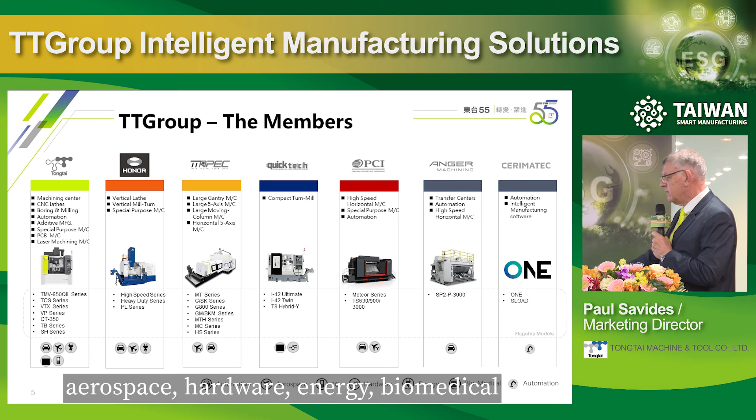TONGTAI is made up of a number of groups established in different areas. The first four of these are in Taiwan, then we have two in France, and one in Austria. These cover the automotive, aerospace, hardware, energy, biomedical, and automation sectors.

This is our digital transformation taking place across all of these sectors that we deal with, so we are able to bring the different sectors' transformation into one single unit for TONGTAI.

TONGTAI was started in 1969 as a small company making special purpose machines. Over the years, it developed into a stock-listed company, following many technology pursuits over many years. During its history, we've gone through four stages.

The first stage was naturally the beginning that everyone has to start with, where a Japanese investor came to Taiwan and started the company TONGTAI. Then we began customization, moving from special purpose machines into customization, and then we transformed.

You will notice very clearly in this slide that each time there was a problem in world economics, there was a little dip. You can see those dips. What happens during those periods is very important—this is when TONGTAI actually puts their most effort into what they're going to do next, and the transformation.

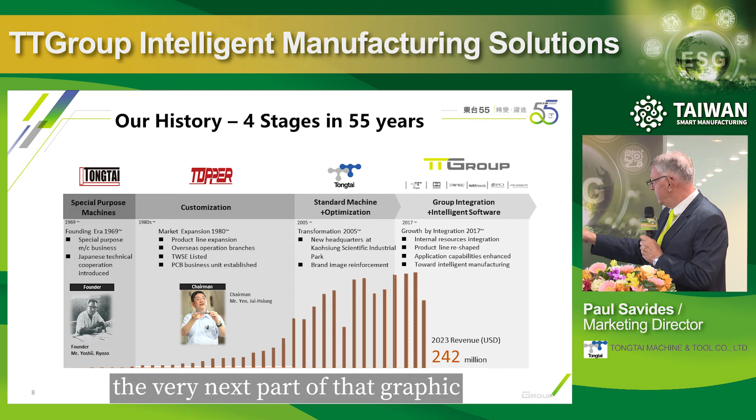We call this intelligent transformation. In each of these cases, once we have taken a dip, the very next part of the graphic shows a sudden increase. We see right now that with the world economic dip that has taken place since COVID...

...we've put a lot of effort into digital and green transformation. You will see that after this, in the next year or two, it will suddenly start going up again because of the effort that all of the companies have put in.

How do we accomplish this intelligent transformation? You can see by this slide that TONGTAI has over 150 engineers. 25% of the employees are in R&D, and this R&D has resulted in over 200 patents that they've been able to establish.

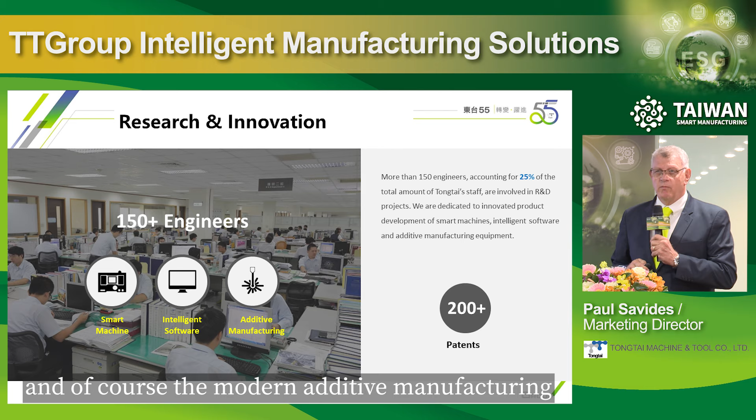These patents all head towards green and digital transformation. We do smart machines, intelligent software, and of course modern additive manufacturing, not only subtractive as it was in the past. Also, TONGTAI has established a global network.

What is important about this global network is not only the factories and overseas branches, but the technical application centers in 7 different countries. These application centers assist customers in utilizing the current technology we have, and we are able to teach them and demonstrate physically what it can do for their business.

This is a very, very important step in not only having this digital or green transformation, but actually handing it over to the people who need to use it.

Our product strategy, as you can see, starts off with a standard machine. It develops into a specific workpiece, or we assist the customer. But what we really like to see and do is integrate the intelligence we have now developed and put it all into the system so that it becomes user-friendly. And that is where green transformation starts to take place.

So what we have is an intelligent manufacturing solution, basically with 7 points. We've taken all of the intelligence that we can do and put it in. We've put automation, we do turn milling, which we now call turnmill. We do the new processes like DED or CNC additive manufacturing. We also do the new industries.

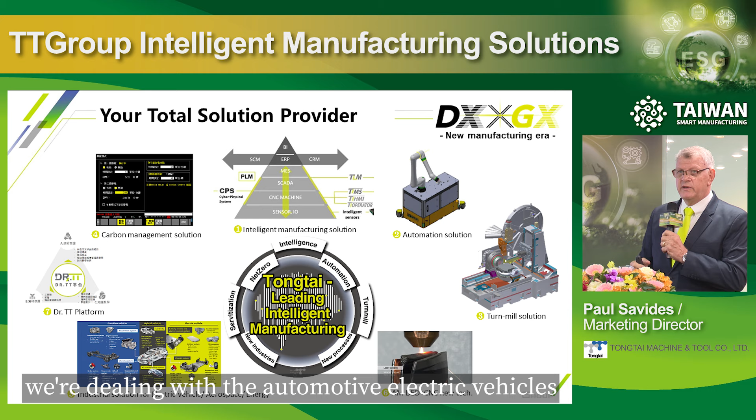We're dealing with automotive, electric vehicles - these are very important for the green transformation in the industry as well. We add to that the servitization. There are systems that we use and give to the customers to be able to improve the service of their machines so they have better manufacturing ability and less breakdowns and less problems.

And we also apply net zero, not only within our own company, but we supply it to every single machine, and we try and improve the machines so that the machines can actually help the whole world improve, because machine tools are the base of the whole world. Everything you see, your glasses, a bottle, everything starts with a machine tool. Your clothes, buttons, anything you can think of, jewelry, starts with a machine tool. Machine tools are used extensively in the world.

So when we have a look at the intelligent manufacturing triangle, it's a very complicated system in the middle. So what we try and do is modify the system to make it more simple for the end users. On the right-hand side, you will see there are intelligent sensors which we've developed. There are systems that help the customer find all the little glitches and faults inside the machining cycles that happen - not only the machine faults, but also maybe a manufacturing fault or a flaw in their system, or that they're not manufacturing smart enough.

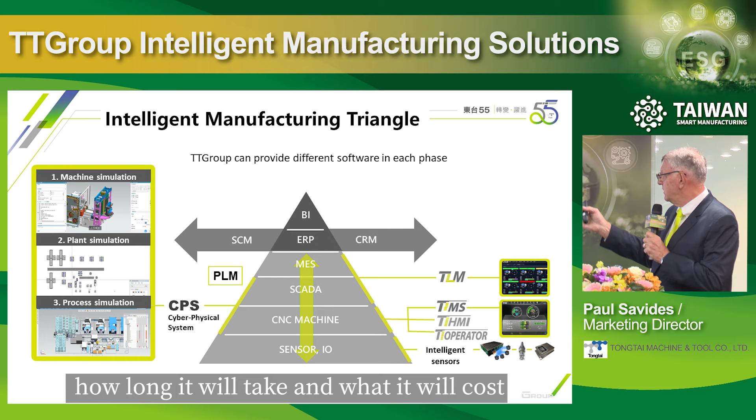On the opposite side, we have our cyber physical systems, where we can actually take a machine and we can take your part, put it into the machine, and machine it with the machine's original CPU. And we can give you an exact time, an exact cost that part will take and what it will cost - and we can do that without even running the machine. So again, it adds to the green that we are trying to achieve.

On the side of the edge computing, we have these management systems that are inside. We have a simple system, the TI operator. It's part of the actual machine system, part of the software that is inside the machine. And what this system does is it gives us all of the parts.

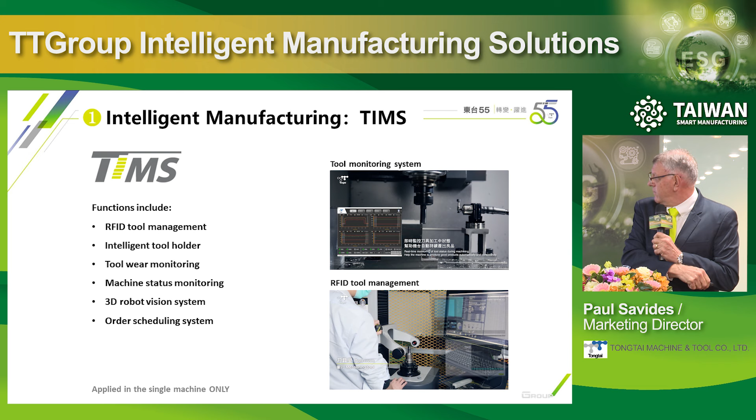We also have TIMS, which is a little bit more advanced than the previous one. And then we have our total line management system, where we can transfer all of our information back into a system that you can monitor from far away. You can monitor something in the USA, here in Taiwan. You can look at any part of the system and you can utilize it.

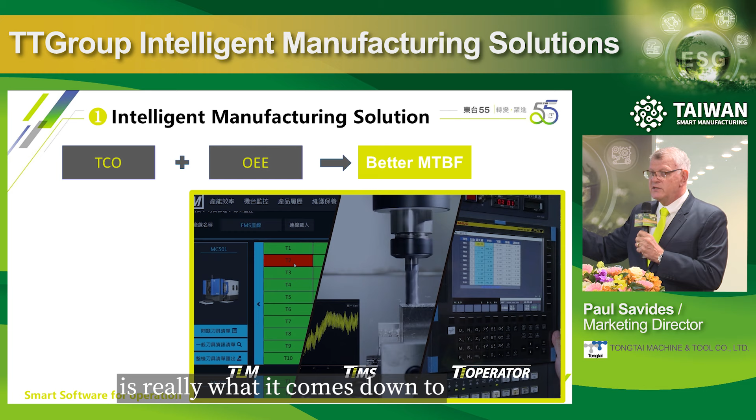So intelligent manufacturing systems come down to a few basics. The total cost of ownership and OEE, overall equipment effectiveness, is really what it comes down to - the mean time between failure of a machine. We measure all of these factors and we are able to reduce the number of failures and therefore increase productivity and therefore increase the ability of a customer to make money.

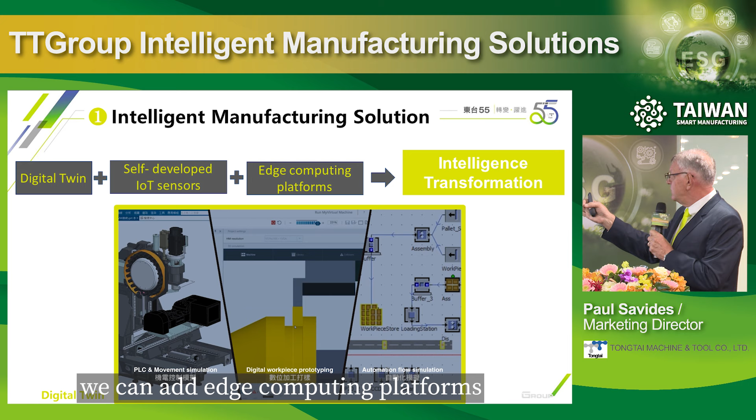Intelligent solutions also include what we call digital twin, where we can take the machine and copy it into a system. We can then add sensors, add edge computing platforms, and then we have intelligent transformation of a machine to become something new and something independent and something that can actually be of value to the end user.

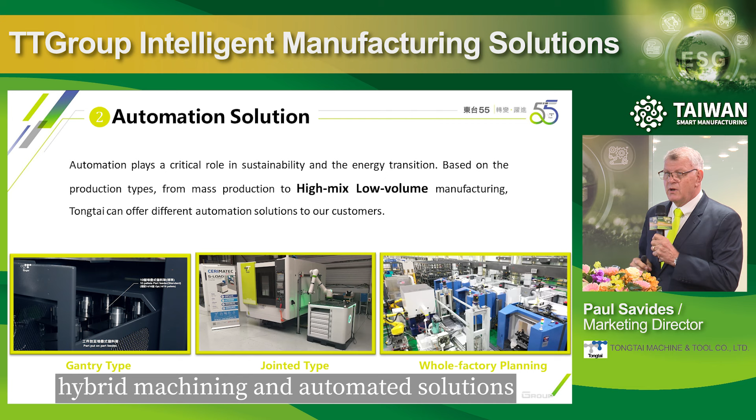The modern machines and the modern way we work with high mix, low volume manufacturing has forced us to make hybrid machining and automated solutions. We really need these solutions today to be able to advance that people can take small volumes, and we can modify and use a lot of technology so that we can have many different products repeating one after the other. That's the hybrid solutions that we have.

So there's an example of a hybrid solution and what it does for the green economy.

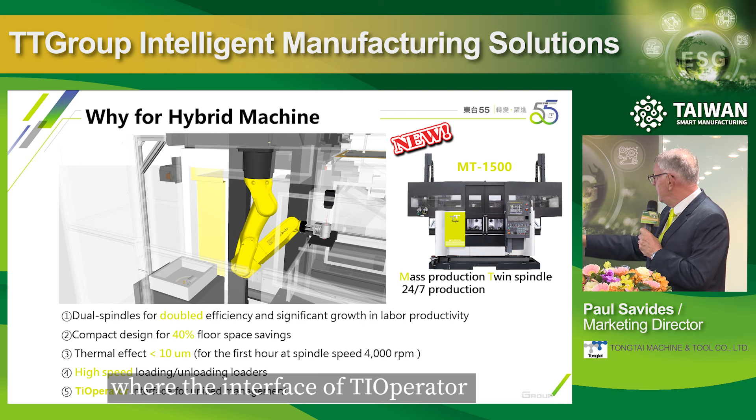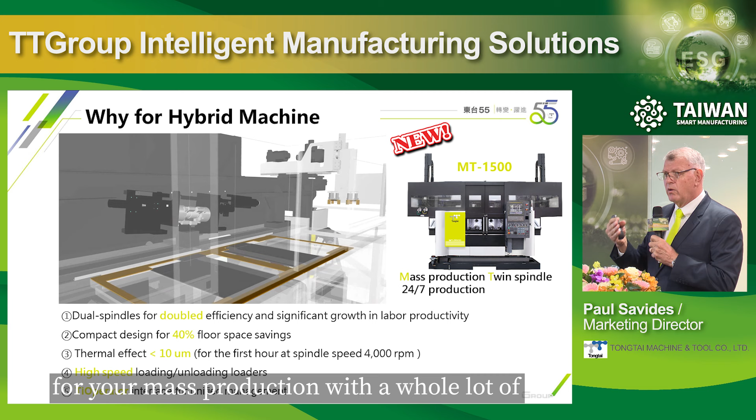It uses less floor space and offers better thermal deflection, with high speed loading and unloading. With the interface of the TIOperator, we can manufacture 24/7 with these machines. What's so important is that not only can they give you more production, but they can give you more varied production for mass production with a whole lot of different components through the system.

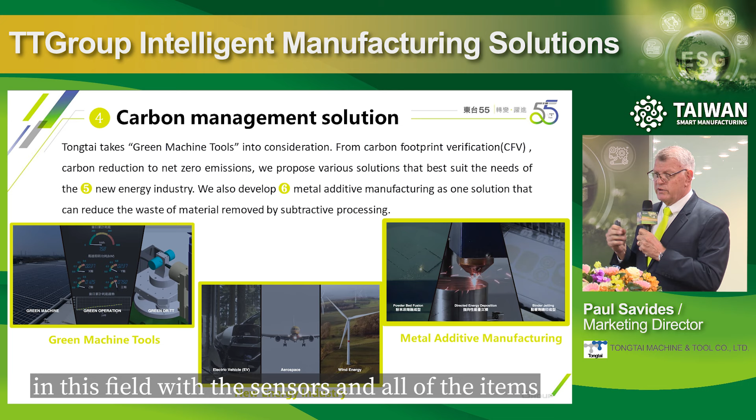A carbon management solution - everything we have done as a company, right through every industry, we have tried to see how we can green the machines, how we can make the transformation to green better and more valuable for the end user and for every country in the world. We aim to be more active in this field with the sensors and all the items we use to make it easier for them.

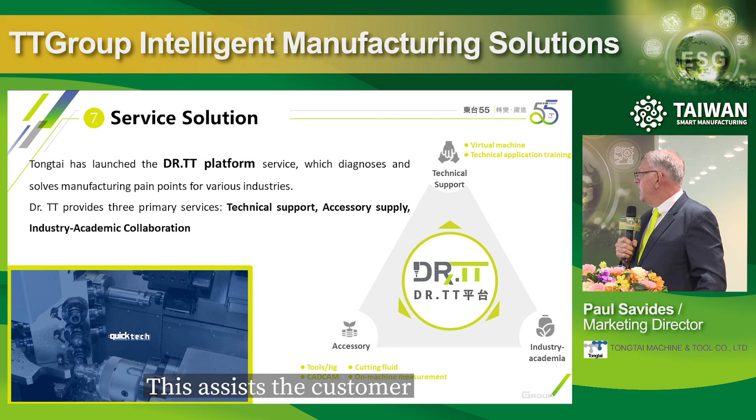In our carbon management system, within our machines we actually have systems that modify and look at the numbers, and at the flick of a button we can see what our carbon footprint looks like. We also have another platform, the DR.TT platform, which is very important. This assists the customer in his ability to look after his machines and keep them running at an OEE of over 85%. It is vitally important that we do this.

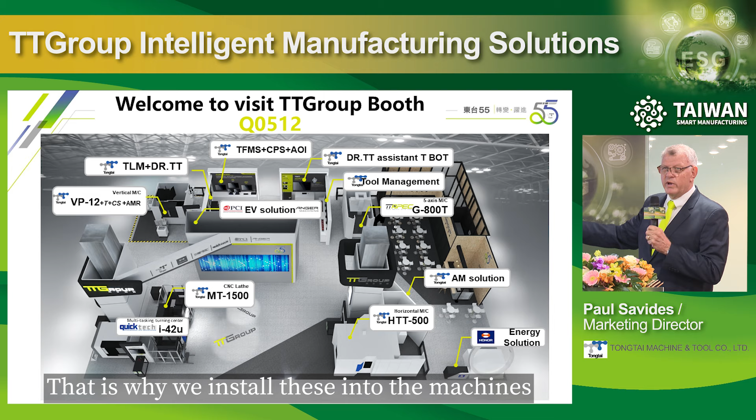One of the things I'd like to tell you is this is very much like a golf club. Take a golf club and put it in your hand, and what is it worth? $100. Take that same golf club and put it in a professional golfer's hand - it's worth millions. All of this technology which we have, and will show you, in your hands is going to be worth a lot of money to you in terms of your productivity and where you can go and what it can do for you and your business. This is why we install these into the machines - they're not for us, they are for you.

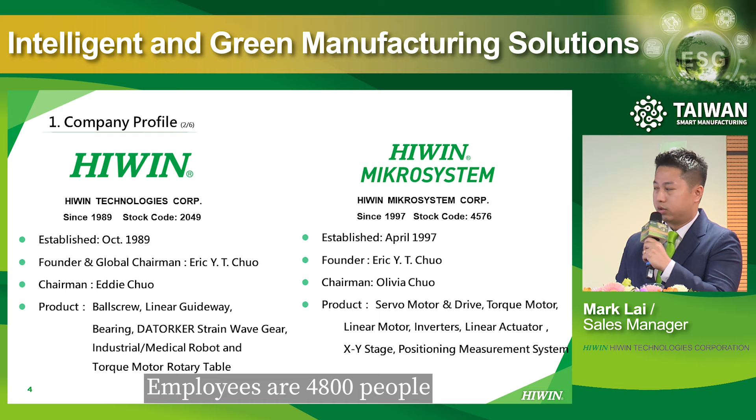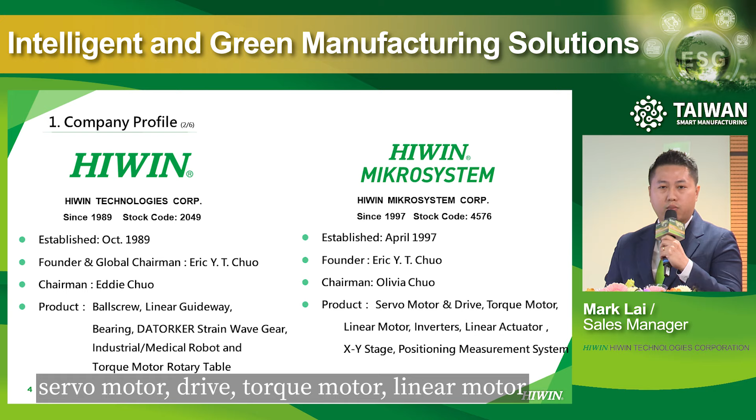HIWIN was established since 1989, and the founder and global chairman is Mr. Eric, and the chairman is Mr. Eddie, with employees of 4,800 people. The product range from HIWIN technologies includes the ball screw, linear guideway, DATORKER strain wave gear, and the mechatronic product for the medical robot and torque motor rotary table. HIWIN Mikrosystem was established since 1997, and the chairman is Miss Olivia, with product range from servo motor, drive, torque motor, linear motor, and XY stage.

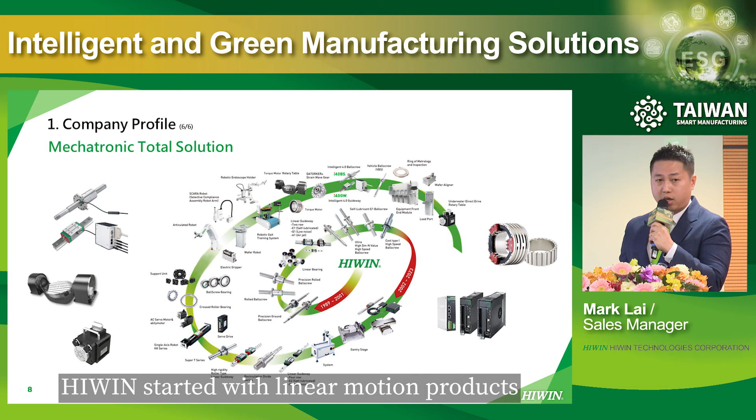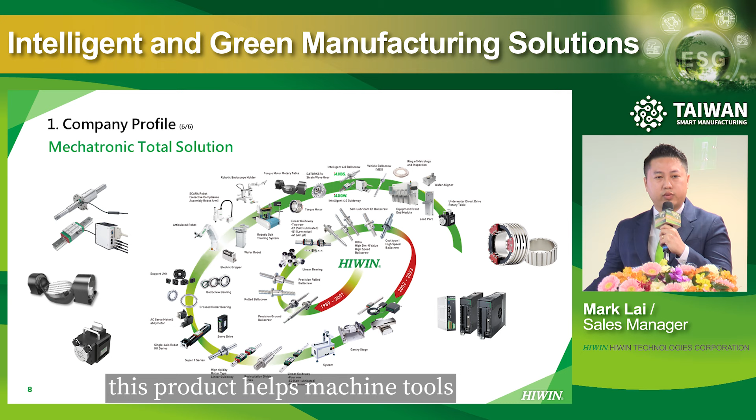HIWIN started with linear motion products such as ball screw and linear guideway, then subsystem products for wafer robot and load port for the semiconductor industry, and then system products for torque motor rotary table. With torque motor technology integrated with the rotary table, and the intelligent module combined with the ball screw and linear guideway, these products help machine tools upgrade their value and productivity.

For the 2024 TMTS exhibition, HIWIN focused on eco solutions for green. HIWIN continues promoting ESG in line with industrial global trends toward industrial intelligence and transformation of manufacturing towards intelligence, precision, high efficiency, and carbon reduction, which has become the dominant trend.

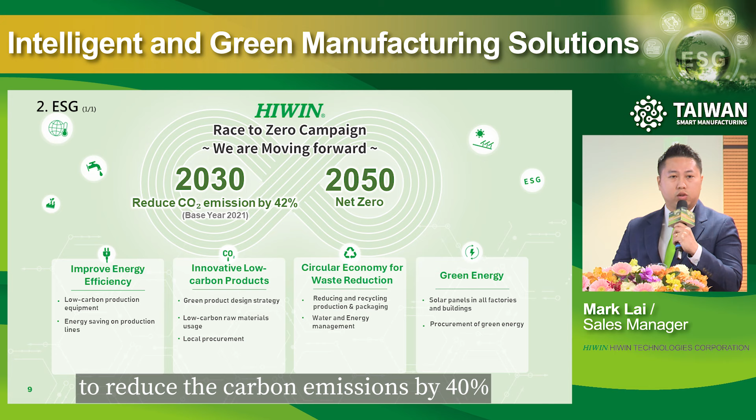As you can see by this chart, HIWIN Group has set a target to reduce carbon emissions by 42% by 2030, and to achieve net zero by 2050, through improved energy efficiency, low carbon production equipment, and innovative low carbon products for a green product strategy design, circular economy for waste reduction, and procurement of green energy such as solar panels in all factories and buildings.

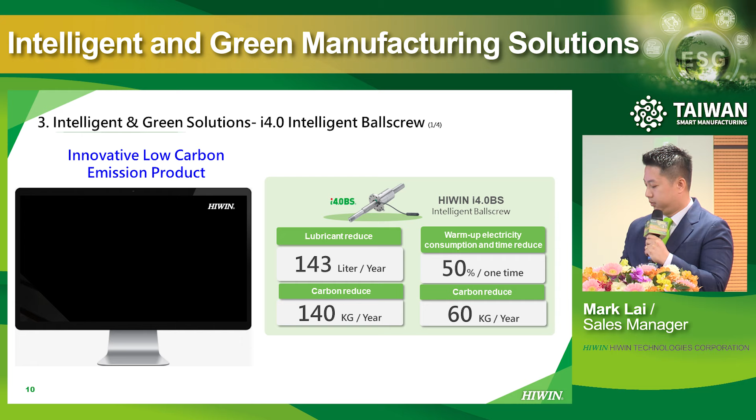In this chapter, I would like to show our intelligent and green solutions. This is one of HIWIN's innovative low carbon emission products, the intelligent ball screw.

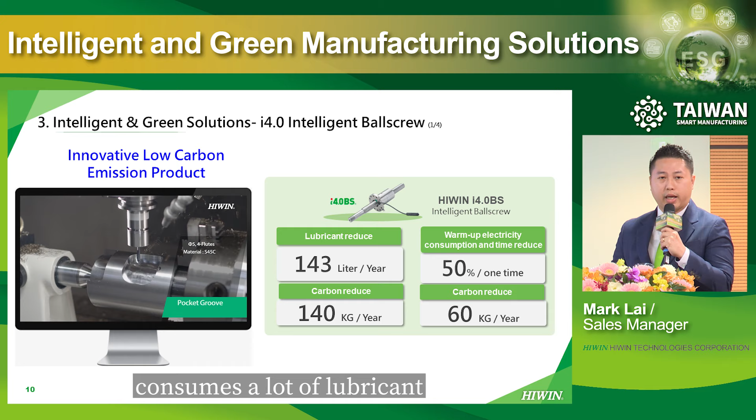I would like to share one of HIWIN's customers. They are using a mill turn CNC to produce precision metal components. The original design of their machines consumed a lot of lubricant, polluted the cutting fluid, and affected the quality of the parts produced.

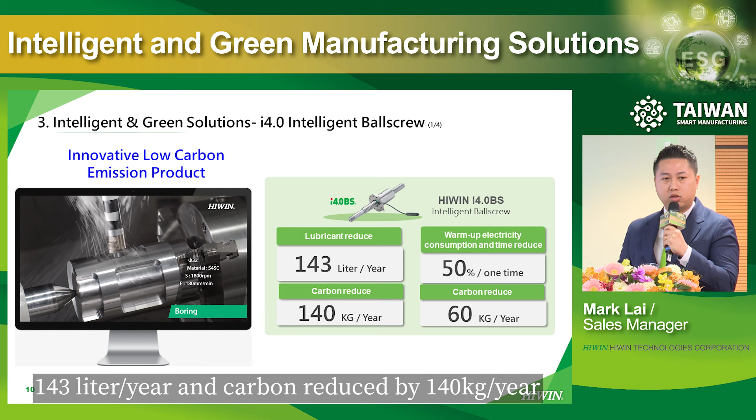With the intelligent ball screw module, the lubrication unit pumps oil only when necessary. As you can see from this chart, using the intelligent ball screw module reduces lubricant by 143 liters per year, with carbon reduced by 140 kg per year. The warm-up electricity consumption and time were reduced by 50%, with carbon reduced by 60 kg per year.

The intelligent module includes ball screws for machine tools, linear guideways, and single axis robots for the semiconductor industry.

With a sensor to detect vibration data, sent to an edge computing module and then delivered to the customer's display device to check the machine's status, there are 4 key functions: vibration diagnosis, life prediction from the ball screw, smart lubrication with the lubrication unit, and temperature diagnosis from the working environment of the machines. All this data is in real time.

After this customer applied the HIWIN RCV series torque motor rotate table, it improved RPM by 200% and production capacity by 25% more, and the accuracy reached the customer's needs as well.

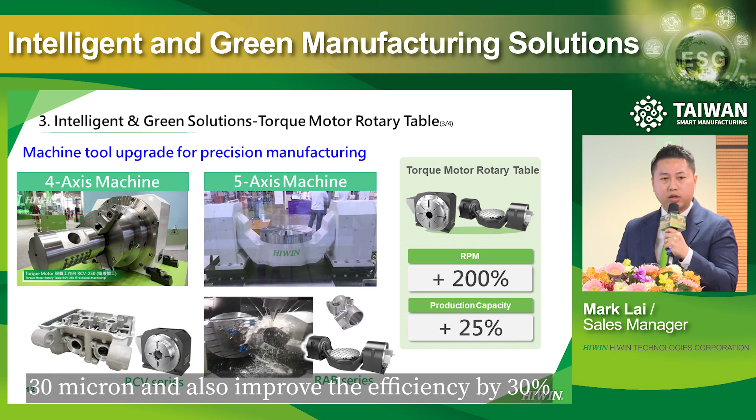The customer decided to change to the HIWIN RAB torque motor rotate table series with improved RPM and zero backlash design. Their product can now reach an accuracy of 30 microns and improve efficiency by 30%.

This is one of the cases for EDM, an advanced lab project we cooperated on with our customers. This customer produces detection probes, as you can see from the picture, for the semiconductor industry. The red circle area is very small, about 0.03 millimeters.

Due to the high demand of the semiconductor industry, this customer needed to increase production capacity. The traditional type of EDM runs at 50 RPM. By using the HIWIN rotate table, it can increase from 50 RPM to 1,000 RPM, which is 20 times higher, and the customer's feedback is that productivity is 7 times more after applying the HIWIN torque motor rotate table.

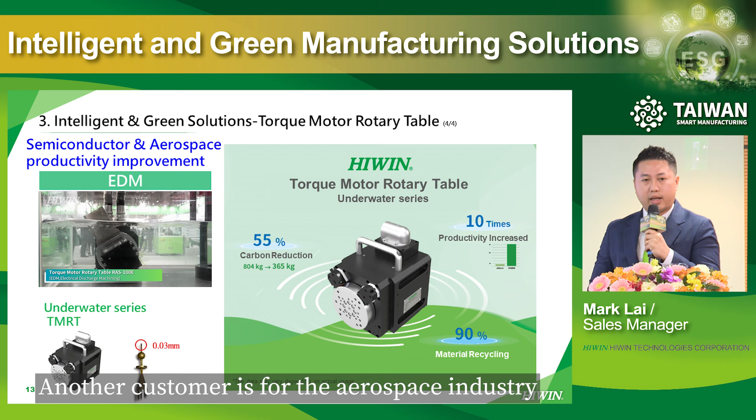Another customer is in the aerospace industry, producing honeycomb structure components. After applying the HIWIN rotate table, their feedback is 10 times more output compared to the mechanical type rotate table.

As you can see by this chart, by using the torque motor rotate table for the underwater series, productivity can increase by 10 times, carbon reduction by 55%, and material recycling by 90%.

From precision linear motion products to mechatronic products, we offer total solutions to our customers. EDM machines can help customers improve efficiency by applying torque motor rotate tables, linear motors, and precision linear guideways. Vertical machining centers can help customers upgrade their machines, for example from 3-axis to 5-axis, by applying HIWIN torque motor rotate table for the RAB series, along with precision linear motion products like linear guideway and ball screw. Servo punches can help customers achieve predictive maintenance using intelligent ball screw modules and precision ball screws.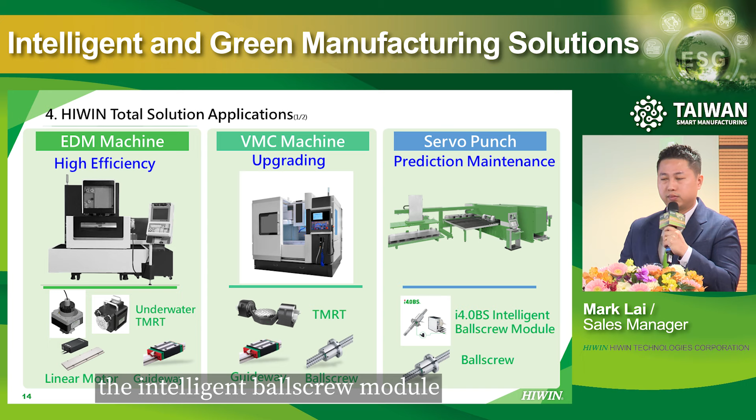At this exhibition we also have many valuable customers joining to demonstrate HIWIN products, such as intelligent ball screw and torque motor rotary table. We welcome you to see our products at their booth, and of course, most importantly, to visit the HIWIN booth.

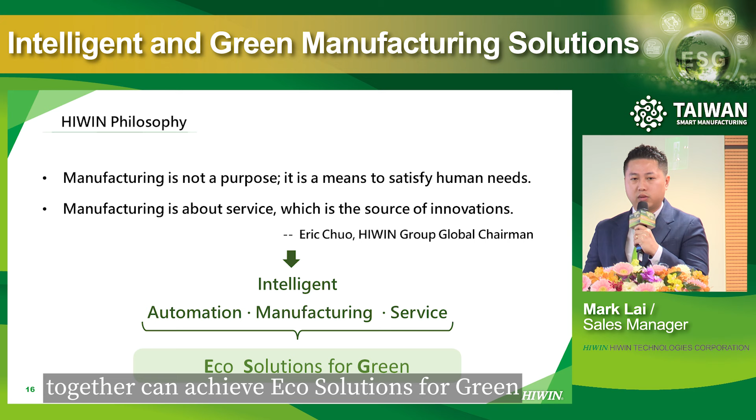The last page is the HIWIN philosophy: manufacturing is not a purpose, it is a means to satisfy human needs. Manufacturing is about service, which is the source of innovation. This is said by HIWIN Group Global Chairman, Mr. Eric. With intelligent design and products combined with automation, manufacturing, and service, together we can achieve eco-solutions for green. Thank you for listening, and later I will take all of you to visit our booth and introduce more product detail. Thank you.

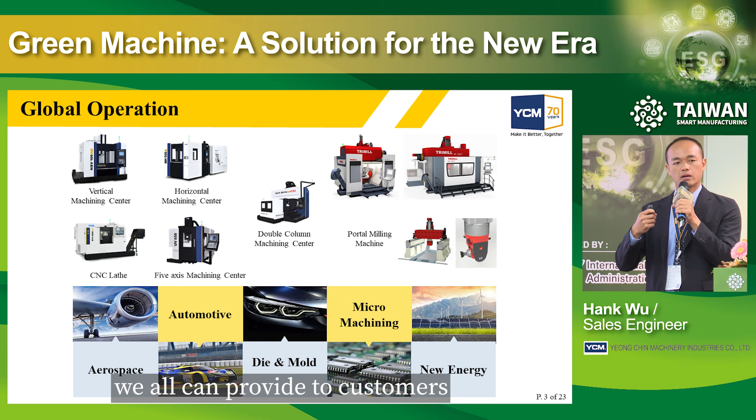We work on the shop floor and listen to customers' opinions, understanding the difficulty in each industry segment, and develop fitable machine solutions for customers, including the vertical machine center, double column machine center, 5-axis machine center, automation solution, and the portal machine center, which is a 5-axis gantry type machine center. From small size, high speed, to big size and heavy duty, all kinds of machining solutions we can provide to customers according to their demand.

Through these years, we observe a lot of market change and challenges, especially more and more customized design and very short product lifetime demand from the market. Even now, 2023 up to today, the slow growth situation is also a matter, and we're facing a lot of labor shortage on the shop floor. Management also has to face the well-known cost inflation and electricity costs.

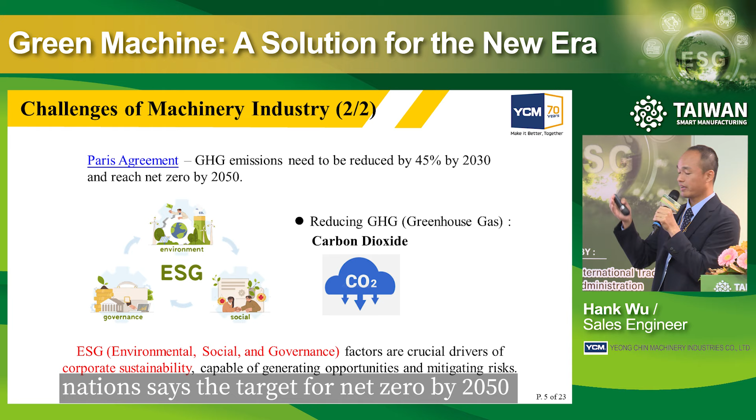Today my topic is also about the environment, ESG, according to the Paris Agreement. The nations' target is net zero by 2050 as a plan, in order to reduce greenhouse gas, and the main greenhouse gas is carbon dioxide. YCM also...

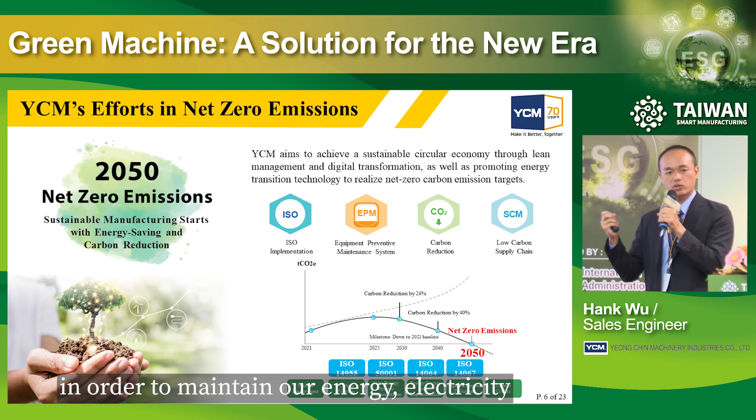For the next generation and our universe, we also have our plan to make an effort in our factories. Recently we already successfully implemented ISO 50001, which is energy management, implemented in order to maintain our energy, electricity, and utilize it in a more efficient way.

Furthermore, we also develop green smart machines. A green smart machine makes life a better place for the environment. So what is a green smart machine? First, machines...

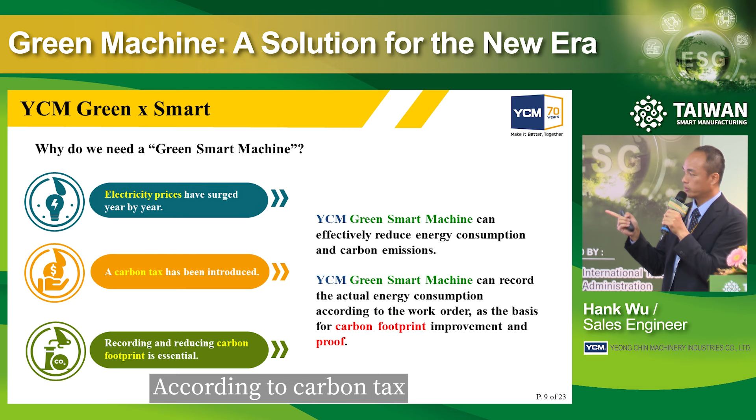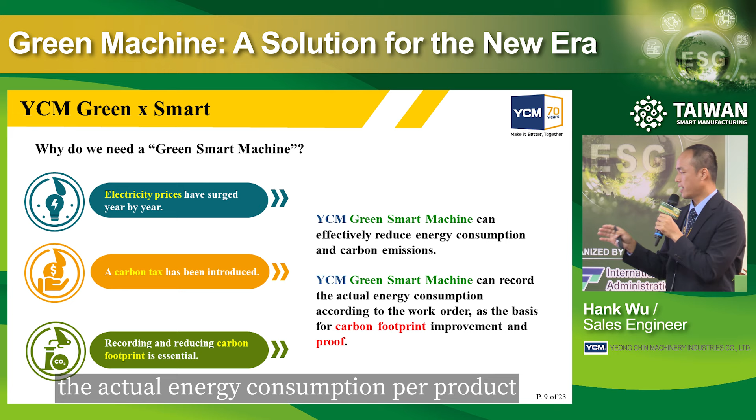Furthermore, not only to help reduce the environmental impact, electricity price is also a matter, and carbon tax has also been introduced. According to the carbon tax, we also have to apply the carbon footprint per product as a document. This is also the reason we provide green machines, because they can efficiently reduce energy consumption and carbon emissions, and record the actual energy consumption per product. So we want to do all these activities with customers to reduce carbon emission cost during the use stage.

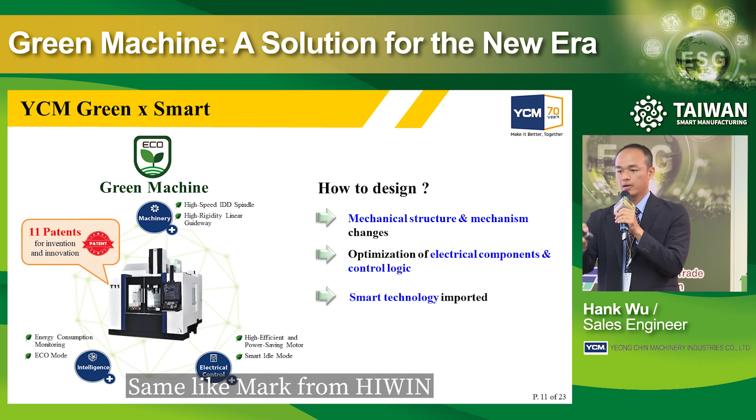In green smart machine, there are actually two elements: one is the green machine, and the other is the smart machine. What is green machine and how do we design it? It's basically based on mechanical structures and mechanism, and optimization of electrical components and control logic. Like HIWIN, we also cooperate with HIWIN, and we have a green team focused on this topic of electrical components, to design a green machine that saves energy.

The other one is smart machine. What is the purpose? When we run a machine, it's not just cycle start then finish - actually there's a lot of preparation time. This situation is almost the same as cooking in the kitchen. Cooking maybe only takes 10 minutes, but washing the food and serving the food to the table also spends a lot of time.

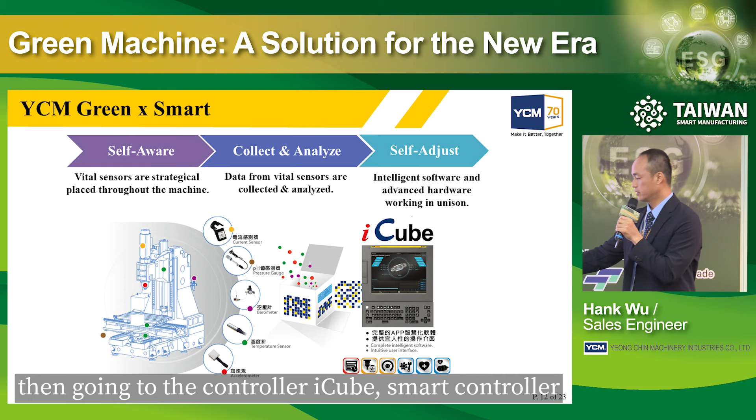If a machine is idling, at that time there's also power energy consumption. So the smart machine helps customers increase efficiency before machining, during machining, and after machining - before process, during process, and after process. It has a self-aware sensor inside, able to collect data. This digitalized data then goes into the controller, iCube smart controller, and through the intelligent software, the machine will be able to have self-adjust behavior.

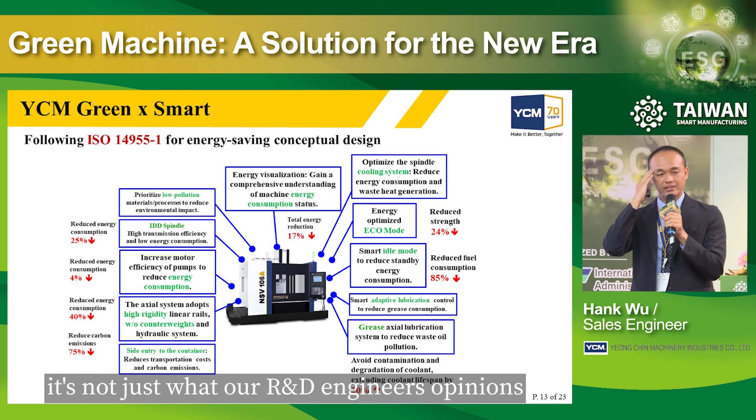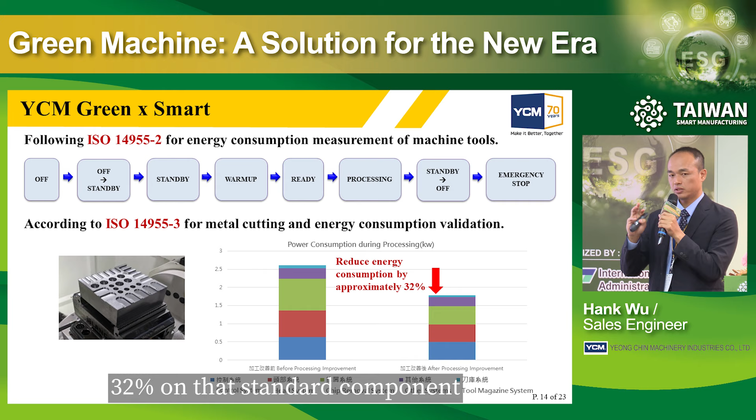This overall design is not just our R&D engineers' opinions, it's also according to ISO standard 14955. That's the overall detail we provide according to the accessory and machine function. We also follow ISO 14955, ISO 14955 2 and 3, and test the overall output. Before and after implementation, we can see a dramatic energy reduction of 32% on that standard component.

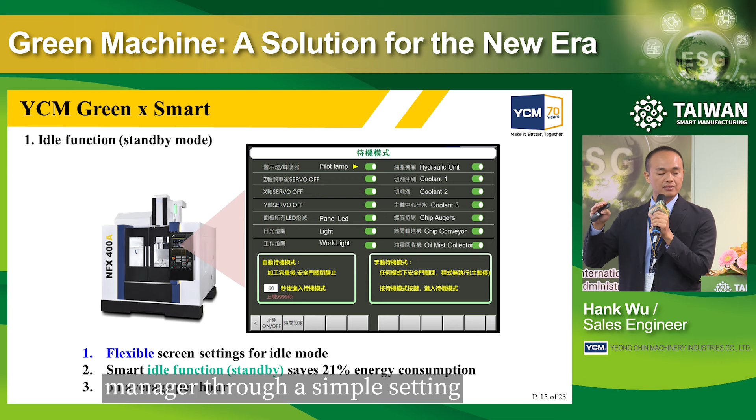So I'll pick up some of the accessories and functions and explain how it works. First is idle mode, as I mentioned. During machine idle, the chip augers, coolant flushing, and LED light may still be turned on, which maybe isn't needed - we can turn it off. If the factory owner would definitely like to turn it off, but the shop floor operator may not have this responsibility. So having this idea, we create a logic in the machine and an easy, friendly interface for the factory manager to do a simple setting, then you can save energy.

Another idea: when we try to cut metal, there's a simpler process - roughing, semi-finishing, finishing. During roughing, it creates a lot of chips, and to remove the chips you require more coolant flow to take the chips away. How about finishing? Finishing is very simple, needs less coolant. So if we give the factory manager or operator the flexibility to change the flushing system and use smaller flow, that can also save energy.

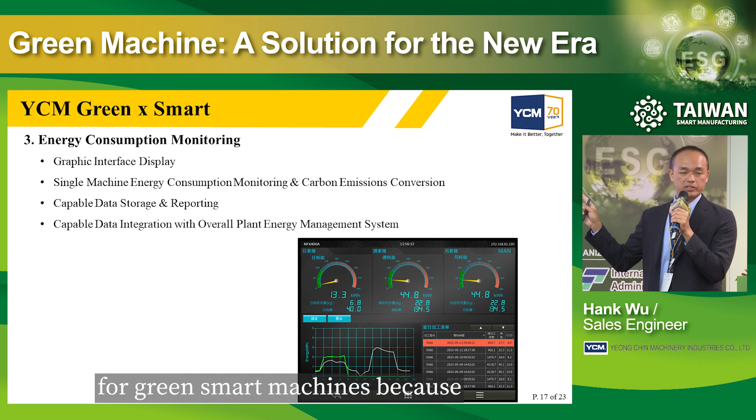Monitoring is also one key function for green smart machine, because only by monitoring how much energy you use on a job can you compare in the future how much energy you can save, and then improve your workflow. That's what I mentioned about smart machines.

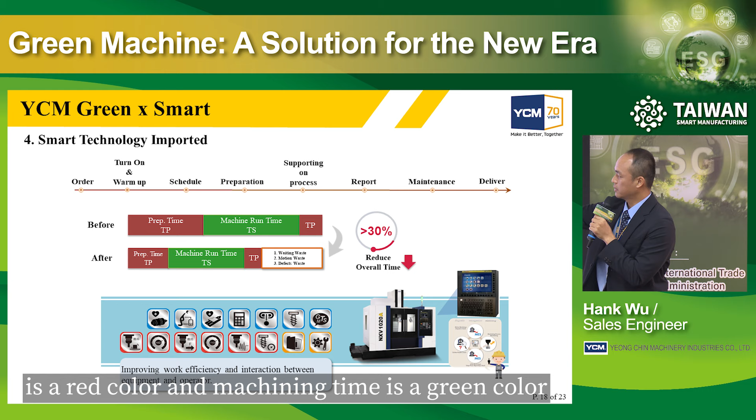From order receiving up to product delivery, machining is just a part. Before and after, you can see preparation time in red, and machining time in green. So the smart machine helps us reduce the preparation time. Also, many machine users should understand that before starting machining, you will also require warm up, so you can maintain stable productivity and accuracy.

And that is a new function that goes through the smart machine with AI technology. We collect data - the data is the machine behavior. We transfer it into digital information and give it to software. After training, we create a comprehensive compensation table list, the parameter list, and give it into the controller. So the benefit is in all the machines, including our product.

Same - we need to warm up. It could be 1 hour, 30 minutes, but it is still time. So after importing this AI smart machine function, you no longer need to have this warm-up period time. It's a very, very big benefit to the shop floor.

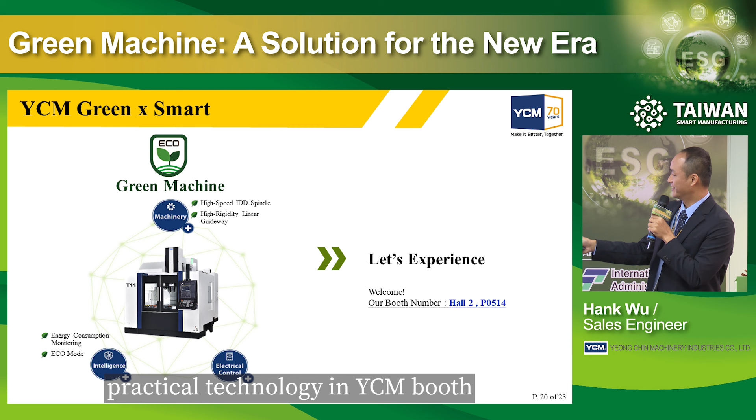Okay, and so I will also again like to explain this practical technology in YCM booth. And we will also show you how we calculate the carbon footprint per product. That is for single machines.

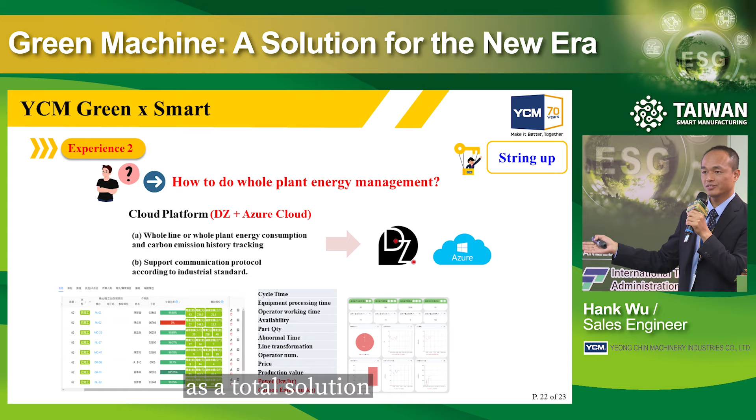Besides, we also have the digital tool to help customers digitize their factory production flow, to monitor and improve product efficiency. Through this platform, we can also understand how to monitor and optimize our energy consumption as a total solution. Okay, thank you, and this is my presentation.

Well, everybody works very hard to design brilliant functions in a wave of digital and green transformation, whether it's modern interface or even carbon reduction. The unique point of Quaser, to surf on the wave instead of sinking in the water, is that we embedded Mr. Q in our machines.

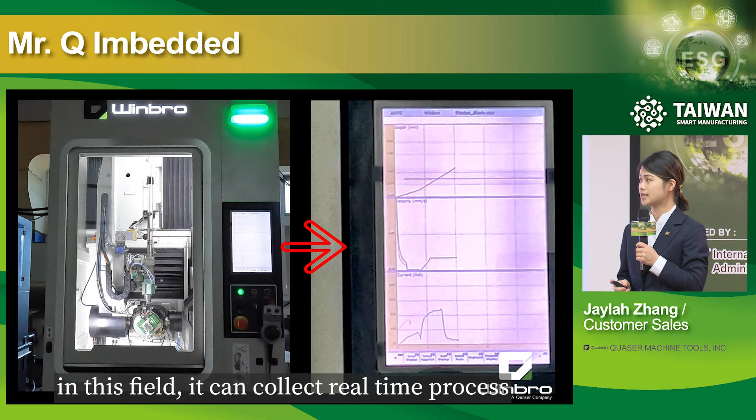So let's take a look at some cutting-edge functions before we dive into Mr. Q. Speaking of digitalization, signature analysis is one of the most important roles in this field. It can collect real-time process data and traceability of each single hole. The graphical system allows our engineers to select and have traceability, to adjust the parameters of each single hole, including breakthrough detection.

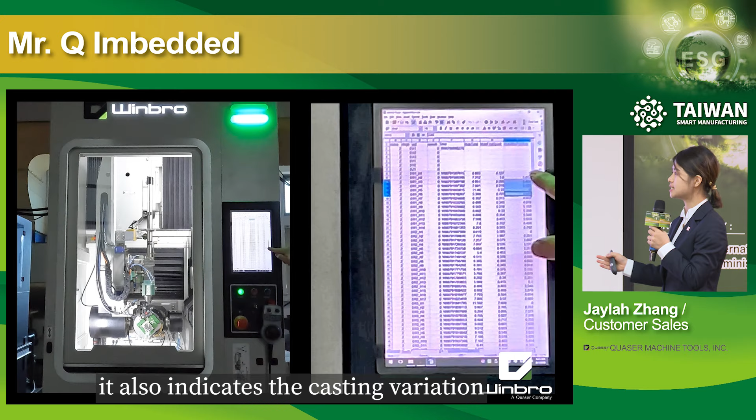It also indicates the casting variation, hole-to-hole, drill-to-drill variation. And the results of this can be investigated for further improvements.

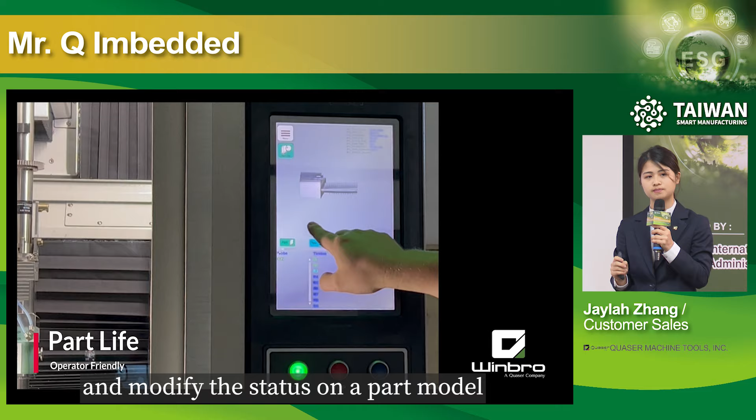Next is our part life management, with an operator-friendly interface that allows users to select features and modify the status on a part model. The progress can be tracked, and the operation will be recorded as each hole is drilled. The amazing part of this is that it can prevent damage from holes that have already been drilled.

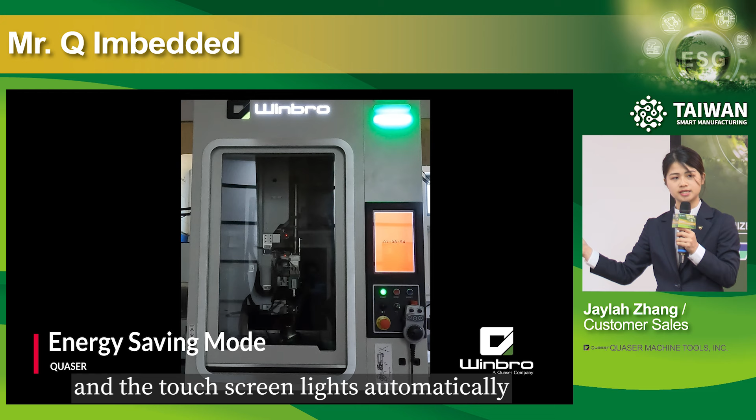Next is our energy saving mode. The machine will turn off the working lights and touchscreen lights automatically while machining. This not only saves electricity bills - imagine a factory with a large amount of machines - but also extends the hardware life cycle. The green light here shows the machine is now processing and functioning normally.

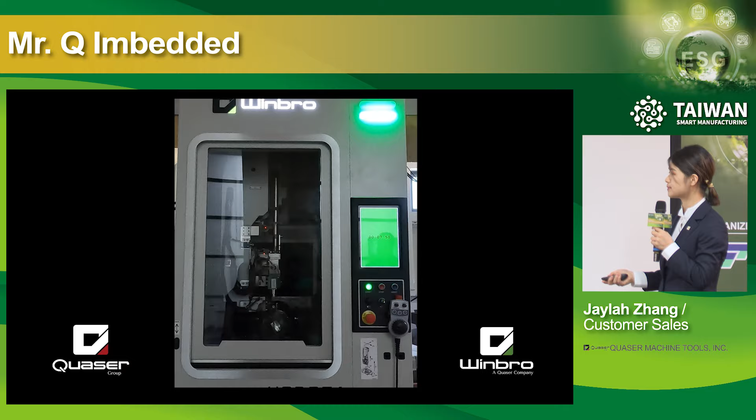Now, when carbon emission, carbon footprints, or even carbon neutrality have become the greatest impact in our life and our greatest concern, it's time for us to roll up our sleeves and do something about it. Therefore, Quaser developed a carbon emission calculating system to help our users be more aware and conscious of how much carbon emission has been produced while processing.

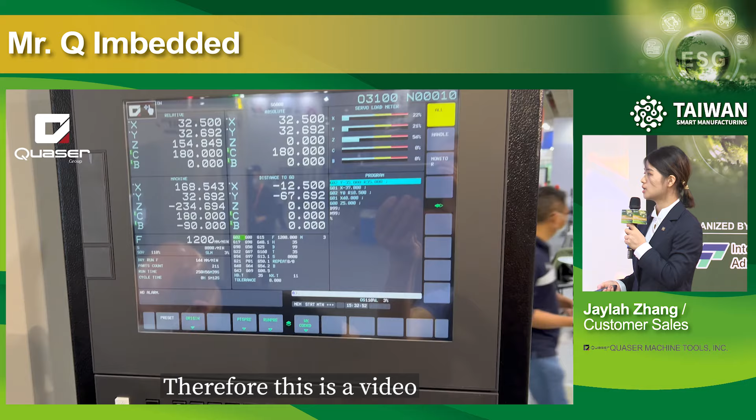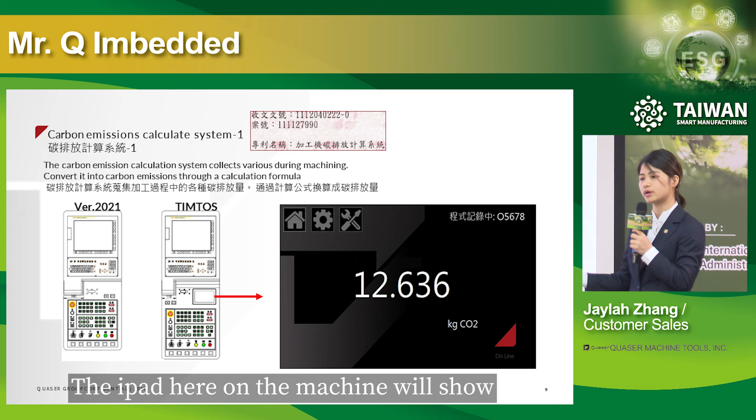So this is a quick video showing where it's depicted on our screen. The carbon calculating system will collect all the numbers into the system, and the numbers will be converted into the carbon calculation. The iPad on the screen, on the machine, will show the operator how much emissions have been produced after processing.

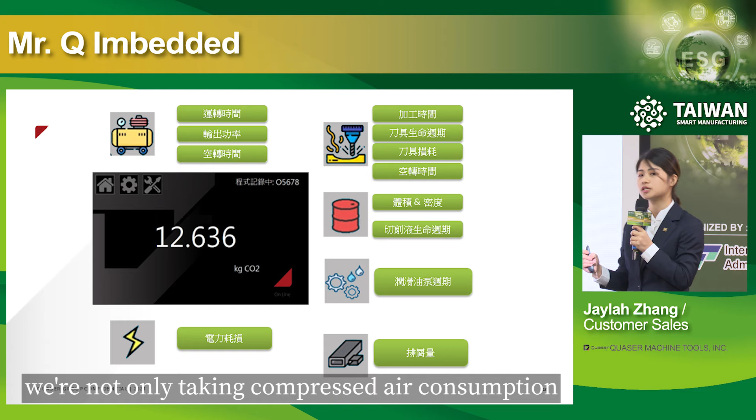In this machining market, a carbon calculating system is actually not a surprising function to be mentioned. However, what makes Quaser so special is that we not only take in compressed air consumption and power, but we also take in tooling, coolants, lubricants, and material. The green box shows the parameter of each emission area. Here are some pieces of reference that support our points, and we're also applying these points into our machines to make a better version of it.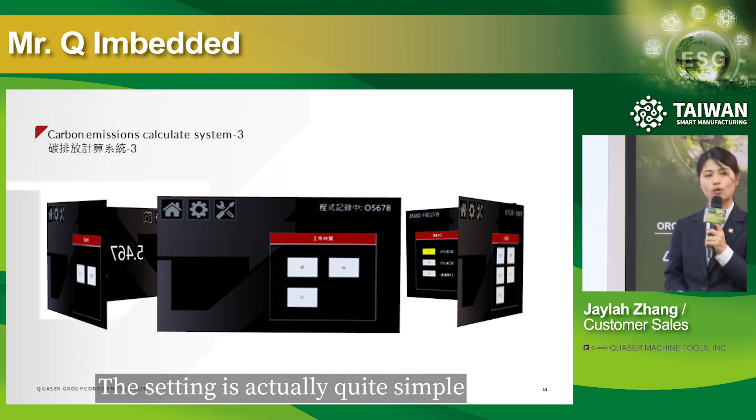So the setting is actually quite simple. Simply choose your material, type of coolant, type of tool, and the system will show you the result automatically after machining.

Now, speaking of Mr. Q, the cool thing about Mr. Q is that you will get answers to any machining questions just by opening your mouth - ask Mr. Q. Whether you are an experienced or inexperienced operator looking for technical answers, Mr. Q is our generative AI that we embedded in our machines. Here's a quick video showing how it reminds the operator, even an inexperienced one, of the preparation needed before processing.

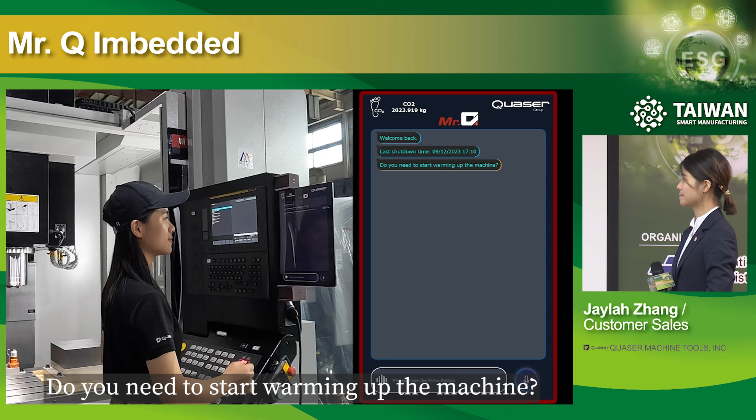Do you need to start warming up the machine? Yes, Mr. Q. Please provide the warm-up preparation and check the condition.

The 5 warm-up preparations are as following, checked automatically. 1. Warm-up O8591 program has loaded. 2. Air pressure source is normal. 3. Please check if there is a balancing tool on the spindle.

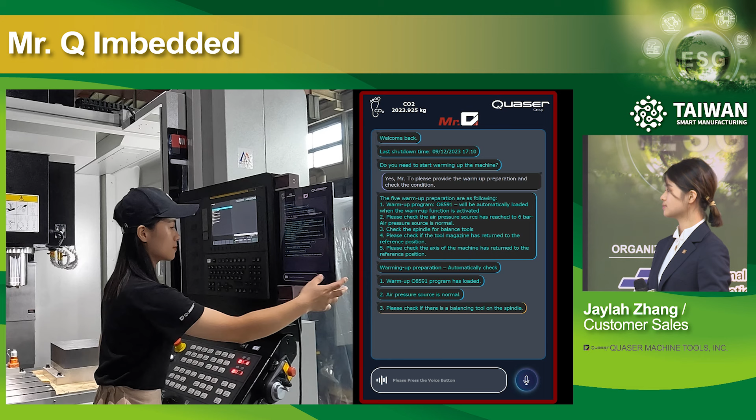There is no balancing tool on the spindle, Mr. Q. Where is it? Please check if there is a balancing tool in the tool magazine.

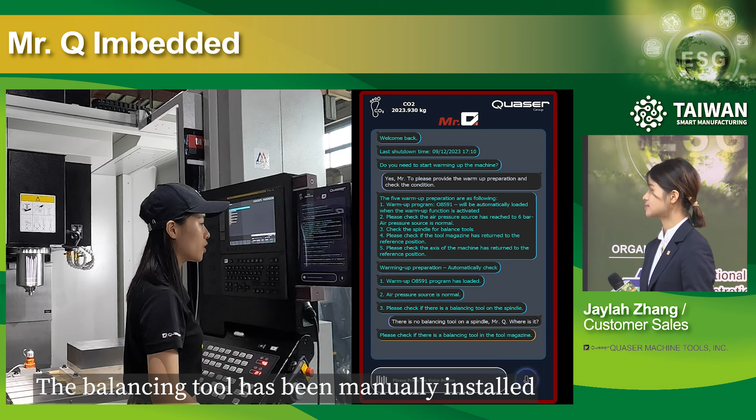Next, it can check the machine's condition. The balancing tool has been manually installed. Please check the warm-up condition. Roger that.

Please check the machine axes have returned to the reference position. Examining. Machine axes have returned to the reference position.

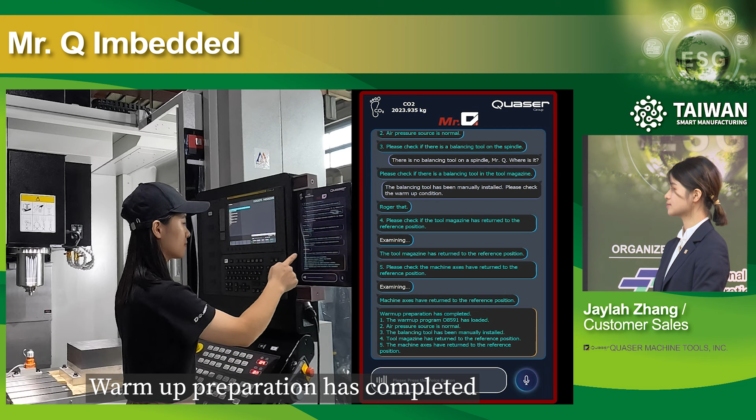Warm-up preparation has completed. The warm-up condition is ready. Would you like to warm up the machine? Yes, Mr. Q. Activate the warm-up program O8591. Start warming up.

It also provides the estimated idling time.

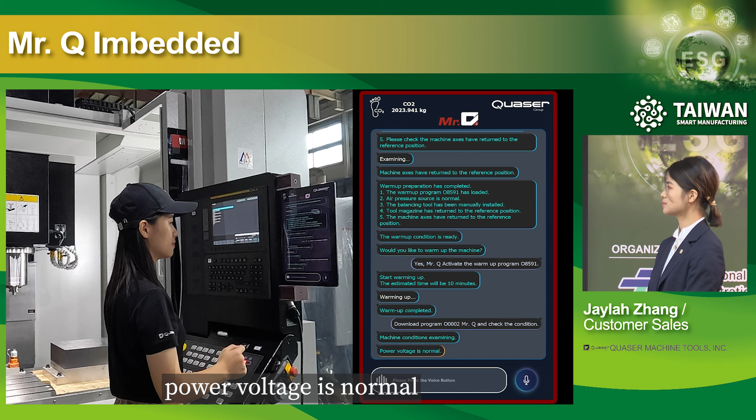Download program O0002, Mr. Q, and check the condition. Machine conditions examining. Power voltage is normal. Air pressure is normal. Axial lubricant supply is normal.

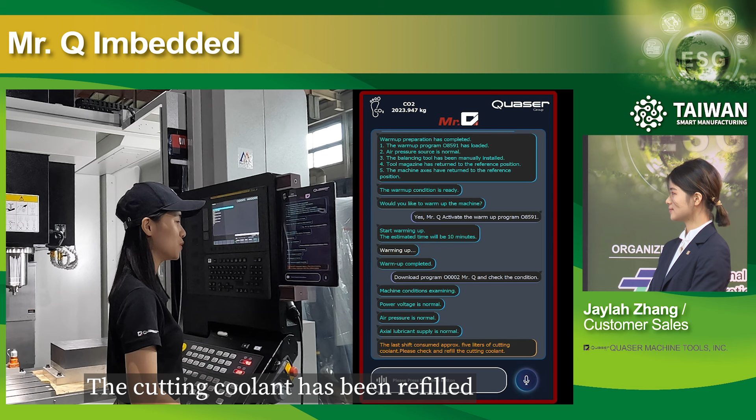The last shift consumed approximately 5 liters of cutting coolant. Please check and refill the cutting coolant. The cutting coolant has been refilled. The coolant tank level is normal.

Spindle lubrication oil supply is normal. Axis motor feedback is normal. Axis motor loading is normal. Emergency stop circuits are normal.

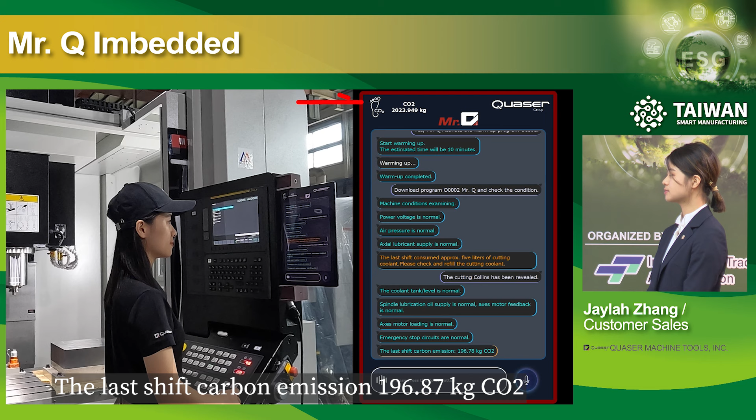It can also calculate, search, and record the carbon emission data in the machine. The last shift carbon emission was 196.78 kilograms CO2. Program O0002 estimated carbon emission is 98.653 kilograms CO2.

And its warning system reduces the cost of carelessness. Please activate machine processing check.

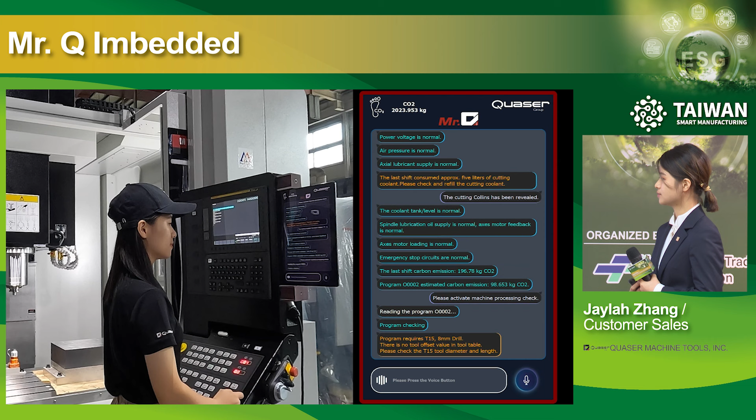Reading the program O0002. Program checking. Program requires T15 8mm drill.

T15 is missing, Mr. Q. Show me the message or alarm list of T15. Alarm list: Tools manually loading, September 3rd, 2023, 15:20.

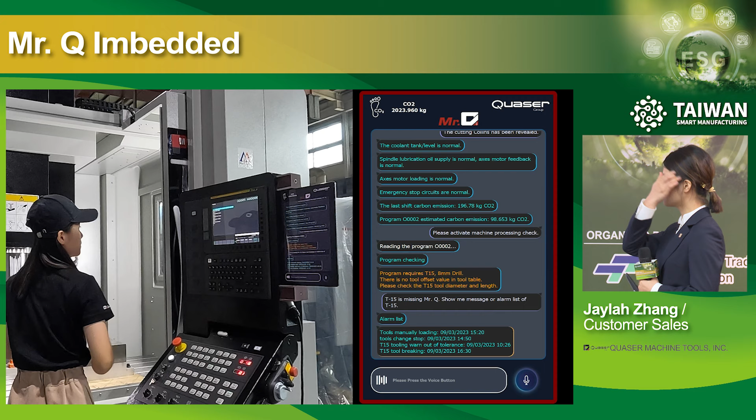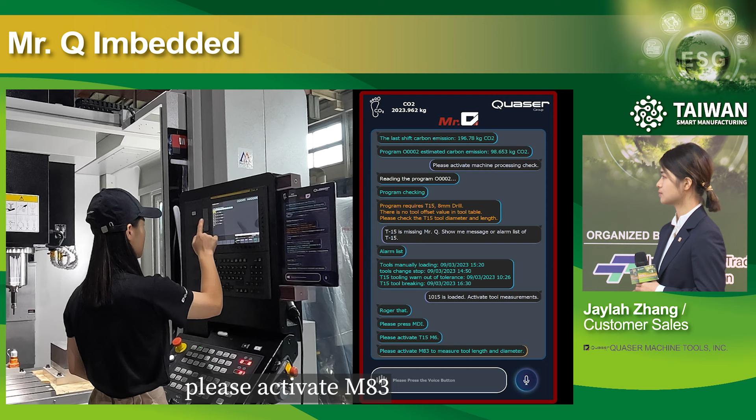T15 is loaded. Activate tool measurements. Roger that. Please press MDI. Please activate T15M6. Please activate M83 to measure tool length and diameter. M83 measurement completed.

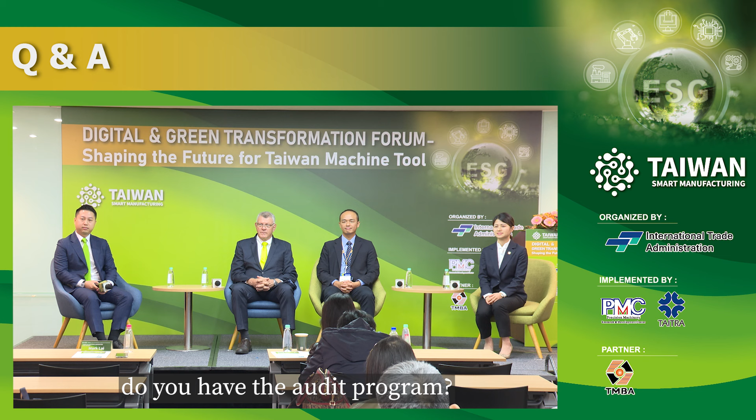Thank you, Mr. Lai. I would like to know, do you have an audit program every year from now to 2050? Yes, we do. You mean the target for each year or something? Yeah, we do.

Yes, but I don't exactly know the numbers at the moment. I would like to also introduce that we have the intelligent ball screw module, and we also apply this into our factories as well. So we can check the status, and also try not to waste lots of lubricant. We're not just selling this product to our customers, but we already use it in our factories in Taiwan as well, so we can detect it.

Any other question? No? So I will come back to my question for speakers here. How do you cope with the regulation of CBAM for your product, and how do you share it with all of our audience? Thank you.

Yes, it is a very tough situation to be in, but how we evolve with it is to be ahead of it. Don't wait for some government to give you a rule to work by. The real rule here is to internally start to work with it, and while you're working with it, you start implementing what you learn into your machines, so it becomes a complete cycle. Unfortunately, one of the hardest things in life you learned in primary school already: energy is neither created nor destroyed, it passes from one form to another. So this is really the key point - you might be fixing something that you are monitoring, but actually you might be causing another problem. So it is very important that within our systems, we not only look at what we are doing, but we add that into our systems to assist us to be compliant at all times.